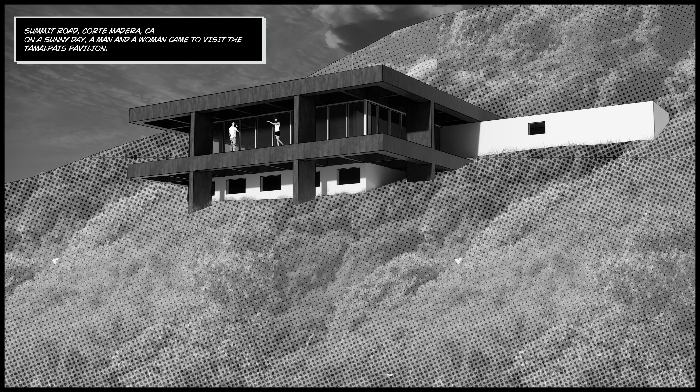On a sunny day, a man and a woman came to visit the Tamalpais Pavilion. The scenery here is really good. I didn't notice this building when we passed by the entrance just now, as if it was embedded in the mountain. Yes, the entrance of the Tamalpais Pavilion is combined with the mountain. As the hillside descends, the viewing platform on which we are floating floats on the landscape.

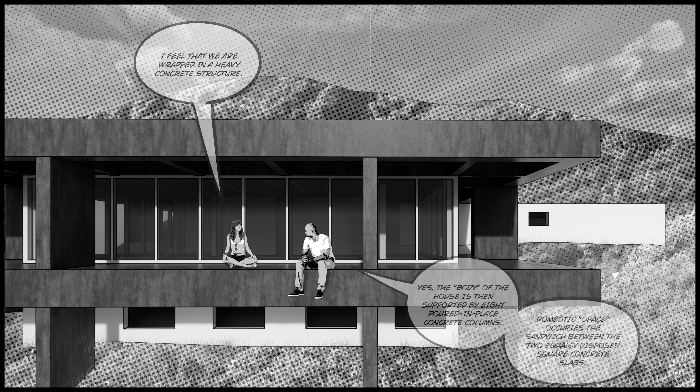I feel we are wrapped in a heavy concrete structure. Yes, the body of the house is supported by 8 poured-in-place concrete columns. Domestic space occupies the sandwich between the 2 equally disposed square concrete slabs. The 3 works of architect Paffard use the same pavilion prototype. Desert Pavilion, Mountain Pavilion, and Great Western Savings are the translations of the same prototype, under different functions, different terrains, and different scales.

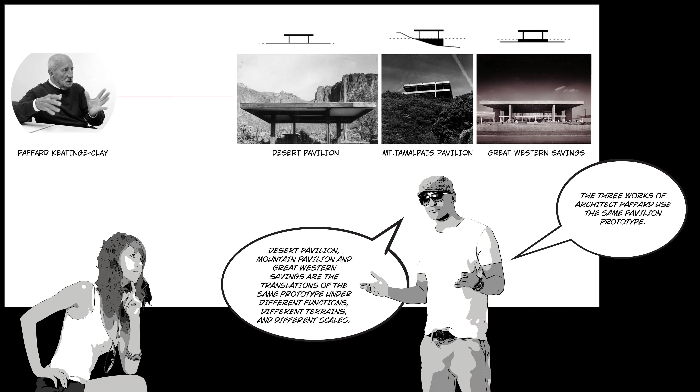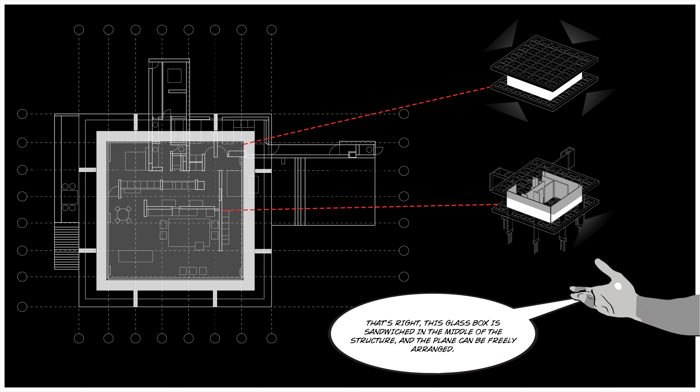From the plan, we passed through the glass box in the middle from the entrance, and then reached the viewing platform. That's right. This glass box is sandwiched in the middle of the structure, and the plan can be freely arranged. At the same time, entrance corridors, private spaces, and outdoor stairs are inserted or attached to the structural skeleton.

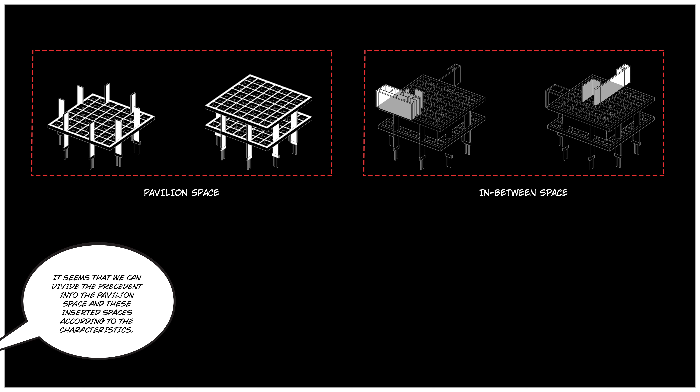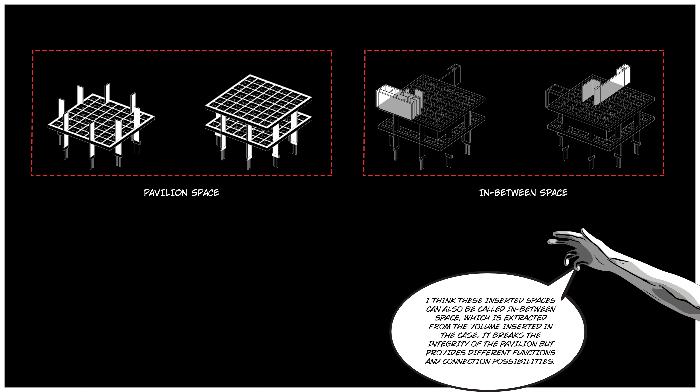It seems that we can divide the precedent into the pavilion space and these inserted spaces according to the characteristics. I think these inserted spaces can also be called in-between space, which is extracted from the volume inserted in the case. It breaks the integrity of the pavilion, but provides different functions and connection possibilities.

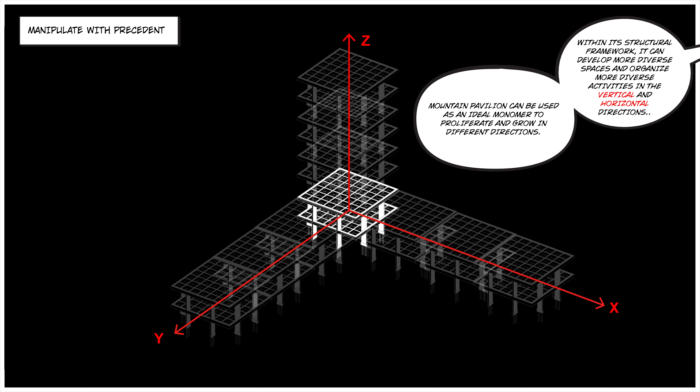Mountain Pavilion can be used, as an ideal unit, to proliferate and grow in different directions. Within its structural framework, it can develop more diverse spaces and organize more diverse activities in the vertical and horizontal directions. Okay, let's take a look.

Vertical version. Los Angeles, downtown. A high-rise concrete building stands, and some white volumes extend from the skeleton to the sky.

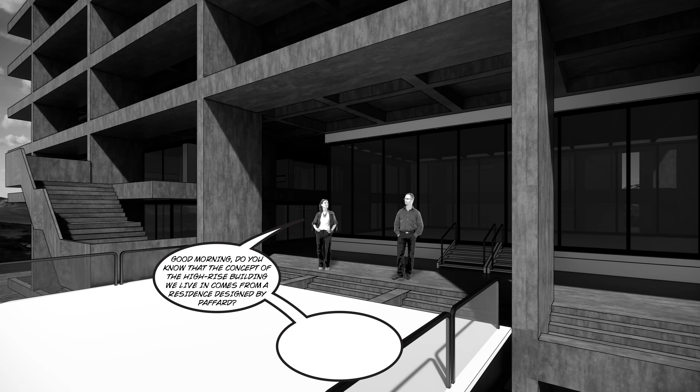Good morning. Do you know that the concept of the high-rise building we live in comes from a residence designed by Paffard? Oh, is it? It is difficult for me to associate a skyscraper with a small house. They follow the same rules.

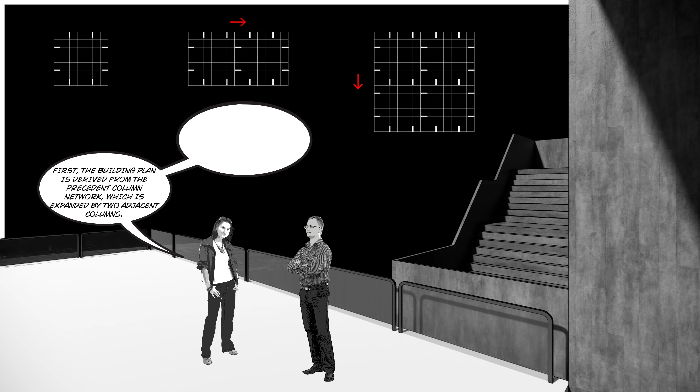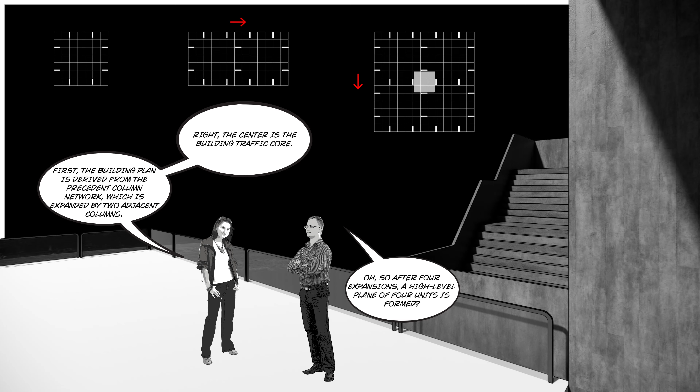Let me show you. First, the building plan is derived from the precedent column network, which is expanded by 2 adjacent columns. Oh, so after 4 expansions, a high-level plane of 4 units is formed? Right, the center is the building traffic core.

After the column network is determined, the L-shaped floor slabs are arranged spirally upwards, which can generate some double height space to satisfy more functions. The 3 types of residential units are arranged in the middle of the column net, and the studio is arranged in the double height space to meet different needs.

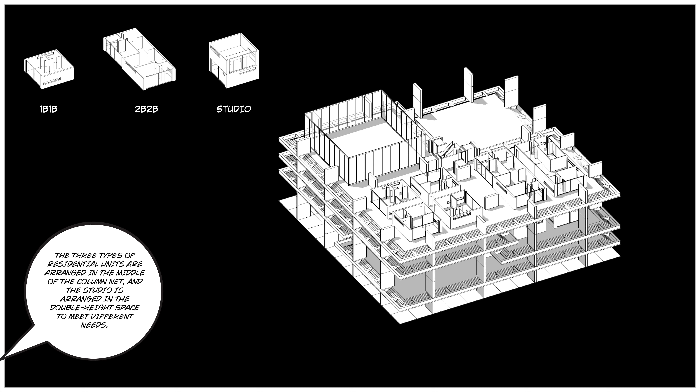I can see that these external stairs are spiraling up like the floor slabs. These inserted white blocks are derived from the in-between space obtained by analyzing the mountain pavilion. In this high-rise building, they stretch to the sky, using a different structure and material system.

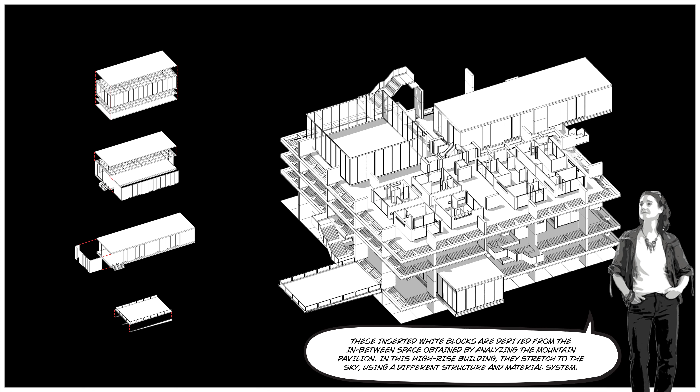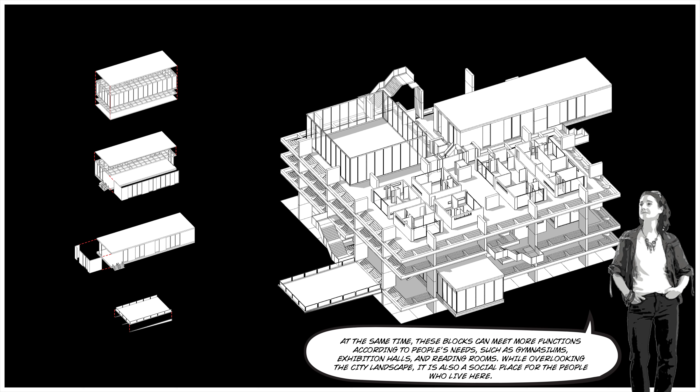At the same time, these blocks can meet more functions according to people's needs, such as gymnasiums, exhibition halls, and reading rooms. While overlooking the city landscape, it is also a social place for the people who live here. At the double height space, there is outdoor stairs hanging outside.

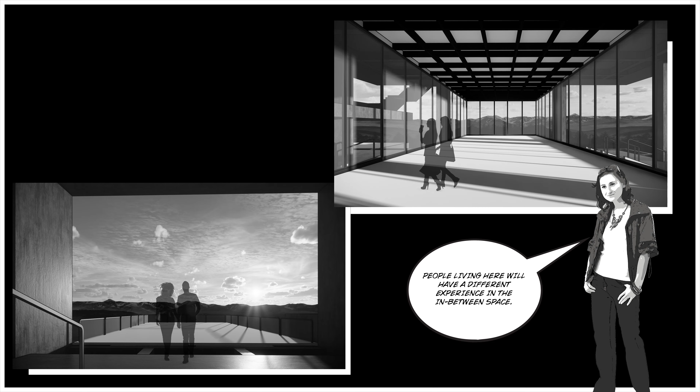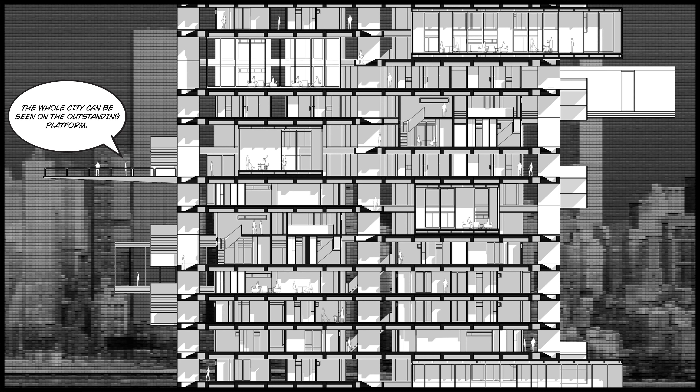People living here will have a different experience in the in-between space. Following the rules derived from the Mountain Pavilion, this high-rise building grows vertically in the city. The whole city can be seen on the outstanding platform.

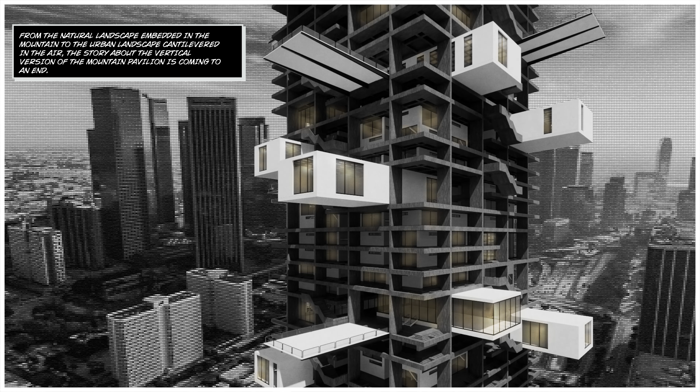Yes, under the structural framework, the layout of space is free. From the natural landscape embedded in the mountain to the urban landscape cantilevered in the air, the story about the vertical version of the Mountain Pavilion is coming to an end.

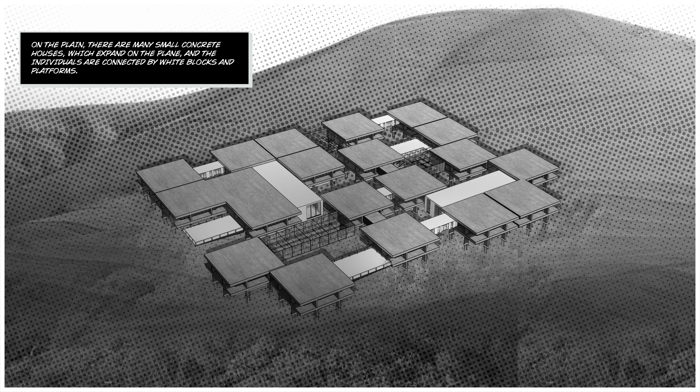Horizontal version. On the plain, there are many small concrete houses, which expand on the plane, and the individuals are connected by white blocks and platforms.

Hi, nice to meet you. Are you a new resident? Yes, I heard that this is a community based on the Mountain Pavilion designed by Paffard. I have lived here for half a year, and I would be happy to introduce you to how this came into being. Thank you. Let's talk as we go.

It can be seen from the plane that the skeleton of the mountain pavilion is used as a complete living unit, replicated and extended on the horizontal plane. What about the gaps between these units?

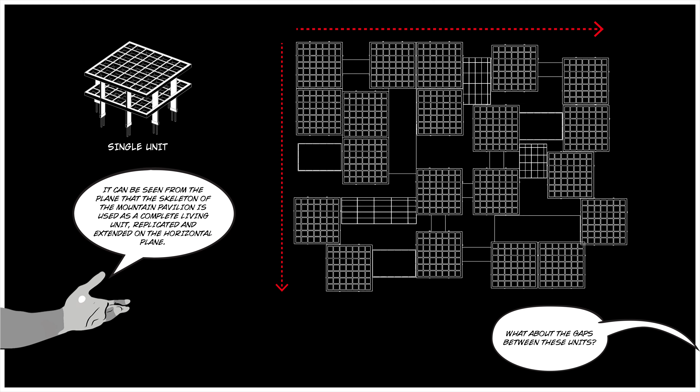Different in-between spaces are placed in these gaps, which are the same as the blocks and platforms inserted in the vertical version. They can be corridors and sometimes used as exhibition halls. These glass boxes can be a place for everyone to hold parties at night.

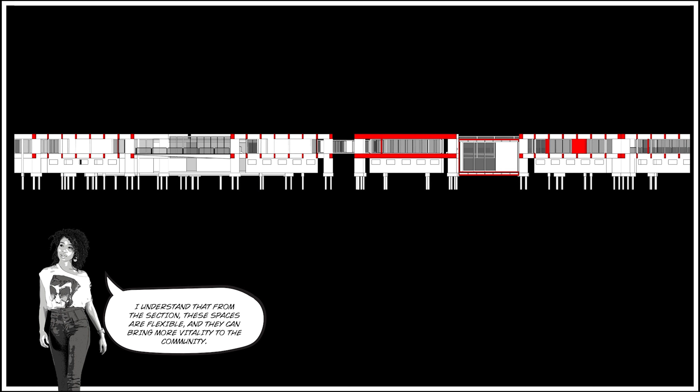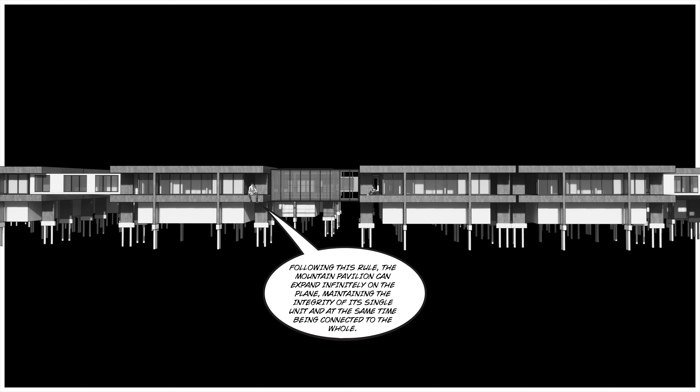I understand that from this section, these spaces are flexible, and they can bring more vitality to the community. Following this rule, the mountain pavilion can expand infinitely on the plane, maintaining the integrity of its single unit and at the same time being connected to the whole. It must be spectacular.

Now, let's go back to Mount Tamalpais Pavilion. These two stories are interesting. One grows vertically and the other grows horizontally. They seem to be unconnected, but the in-between space filled in the gap is the same.

That's right. The vertical version is based on the city, and the horizontal version extends in the natural landscape. Perhaps one day these two versions will merge.